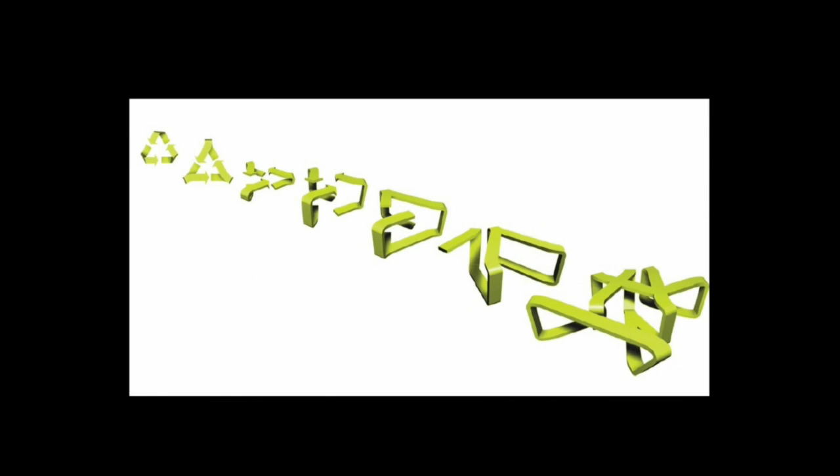To go a step larger, this is an exhibition space for Autostadt Volkswagen in Wolfsburg. It's about an hour away from Berlin. That's where you would go to pick up your car. It's a whole themed land around the car and mobility. And we were invited to do a competition on mobility and sustainability, which is part of their main building when you enter the whole Autostadt land.

The idea of the sustainability issue was, I have to go back here one moment, the triangular recycling arrows that you see all the way up in the left corner. This simple idea of recycling has long been taken over by a much more complex understanding, where dead-end roads in ideas of how we consume or behave sustainably are replaced by a certain uncertainty. If biodiesel was the solution 3 years ago, half a year later it was considered to be dangerous because it produces 4 times more carbon dioxide.

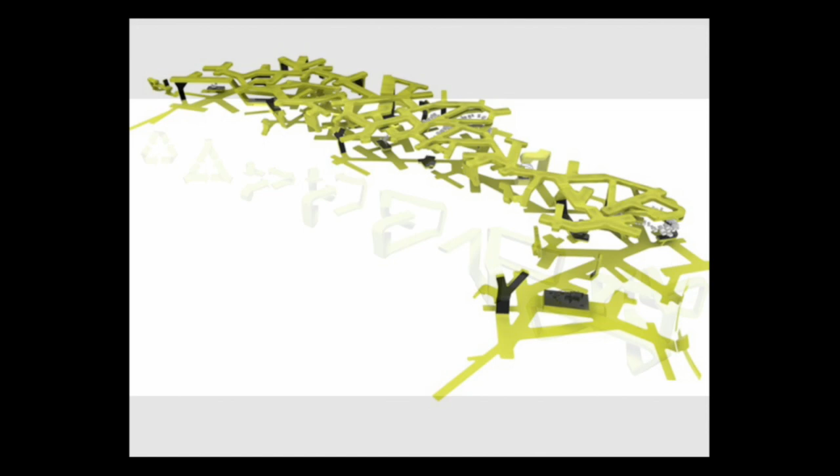And now this year, with all the missing rain, it even threatens the idea of providing enough food for the people. So constantly we have to re-evaluate how we are considering this responsibility for a future generation. This network of interdependencies, dead-end streets, became somehow a forest, a nature labyrinth, where all the different information points are embedded in this structure.

And if you are very interested, you can zoom in very deep into the information. If you are more on a distraction, or let's say on a stroll through the whole Autostadt, then you also still get a feeling of what the possibilities and the issues of mobility and sustainability can be. They count about 2,000 to 3,000 people every day going through this exhibition.

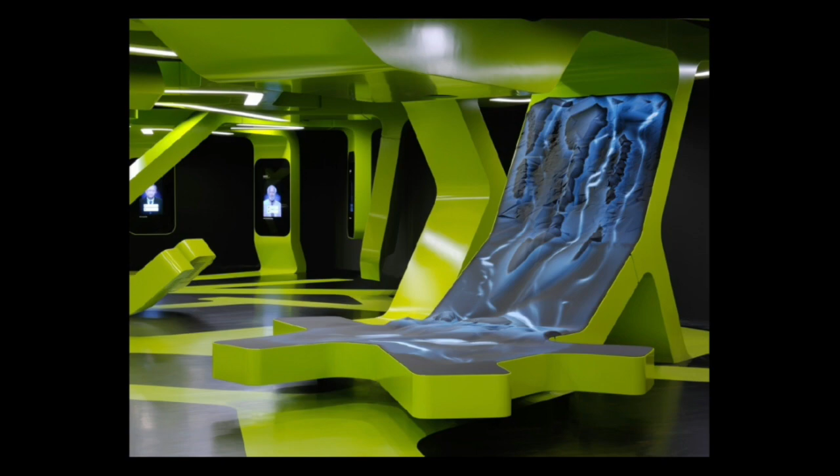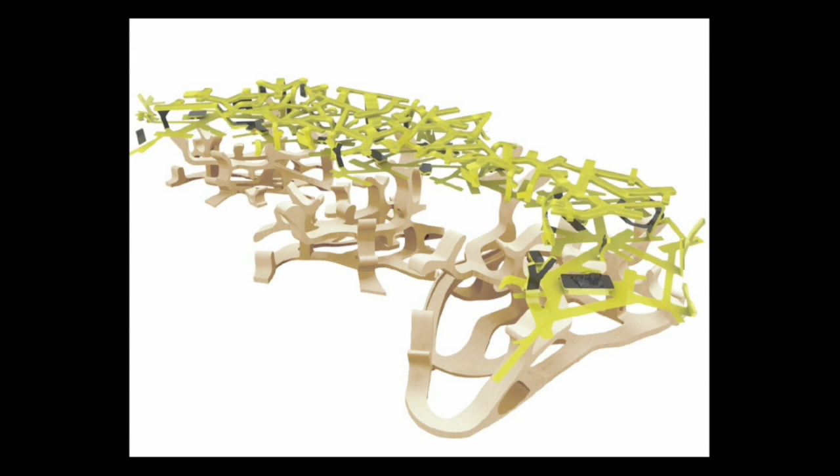Here you have a virtual waterfall. When you touch it, it creates different letters and combinations of insights. This year, we got invited to extend this exhibition in the same building, but on a lower floor, into a larger space that also brings this issue to kids from like 4 years to 12 years. And we extended this green world into kind of the stem, or let's say the roots for the mobility. And this is how we are working on this topic now.

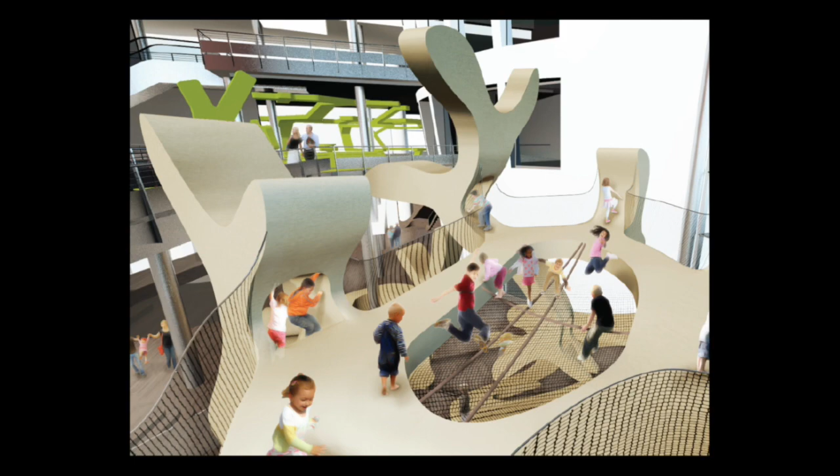It's all indoors, and it becomes something that's playful, that deals with the motoric and sensorial aspects of children's movement. And there are also, of course, stands and materiality solutions that all deal with the same issue here. So it's a concept that actually gets more and more developed, and also the geometry gets more complex now.

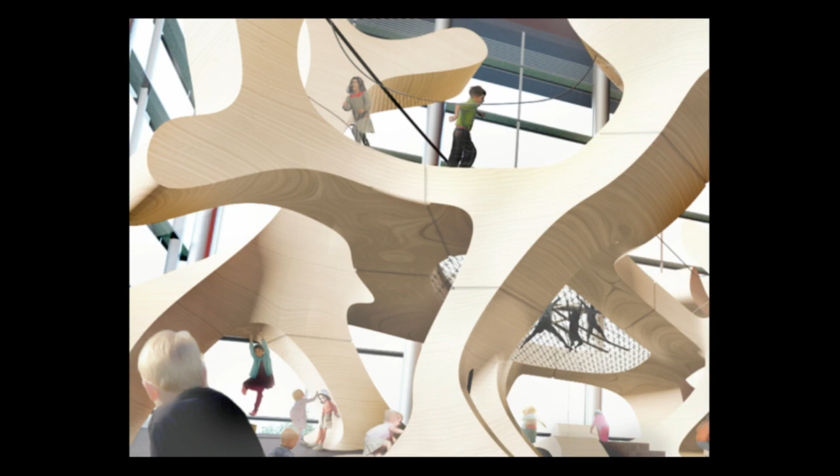Oh, I have a pointer here, up here.

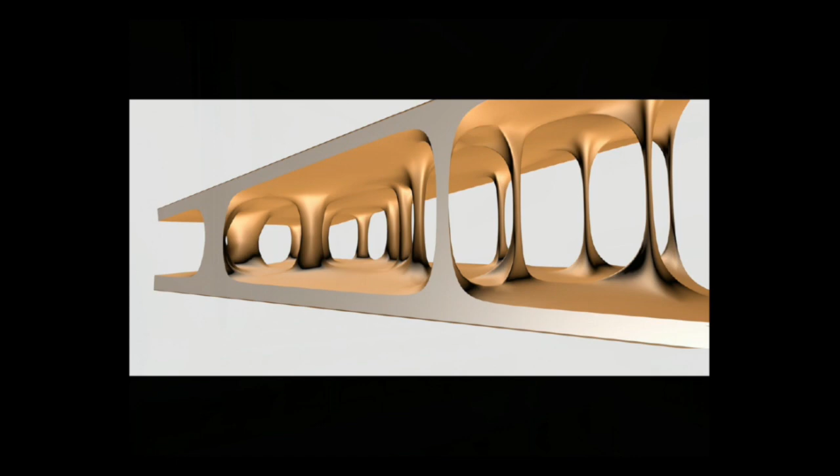This is then the building, and the problem was when we won the competition, we had to also confirm that it's buildable within the budget of a public building. The price was quite fixed. So the challenge was how to actually realize and materialize this building with a budget that was actually too little in a way. It forced us, and I hate to say this when there are maybe possible clients in the room, but in a way it helped us to become very innovative in the construction proposals.

We developed different comparable structures: concrete, wood, timber, steel. In the end, it became a timber construction with a polyurethane coating. And what's actually interesting about this, it's very easy to prefabricate. You bring it on site, you spray on the 3mm coating. It still is diffusion open, so the humidity can actually vapor. The wood is very protected.

And what becomes important, even more so in the Seville project that I'm showing at the end of the lecture, you also save a lot of wood because the 3 centimeters or 2 centimeters of weather protection that you have to consider in wood construction is replaced by this weather protecting layer. So there are a lot of aspects where this building in the end became a prototype for sustainable construction in Germany. And it also caused a lot of, let's say, strong criticism from German architects, because usually that's not what you do to wood. But it proved to be actually a very interesting solution. But at that time, like maybe 7, 8 years ago, this was not something to do.

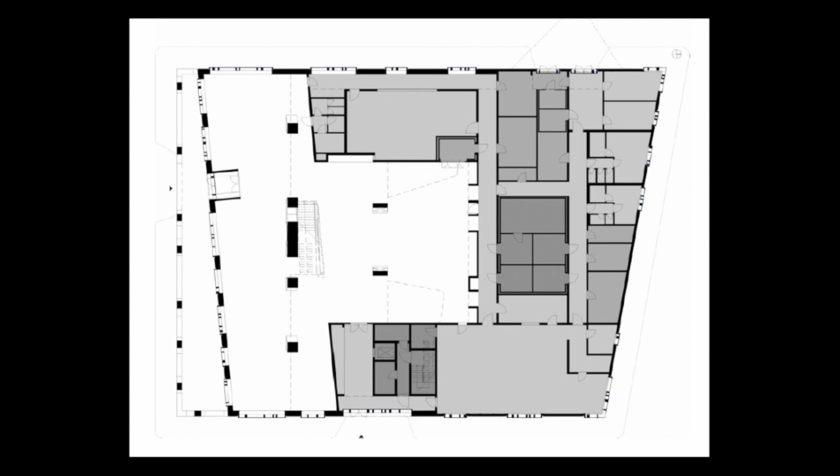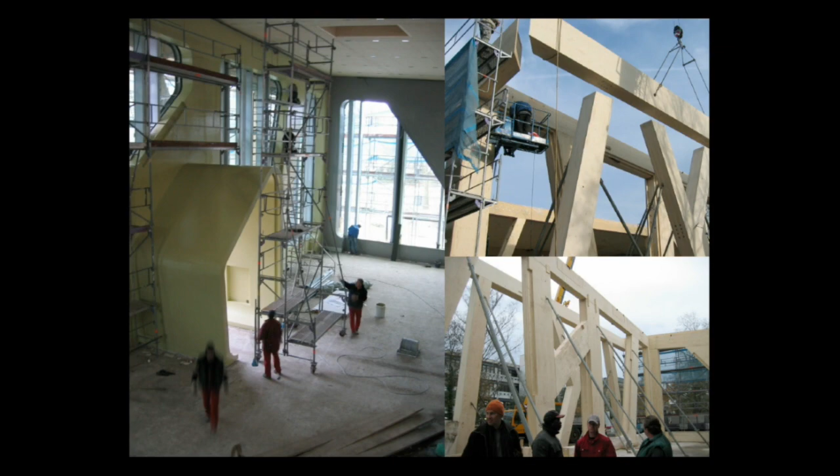It's prefabricated, you bring it on site. It's actually sheets of 2 meters by 40 meters, and you can cut out any shape you like. In this case, it was very straightforward, put together. The insulation happens within the layer of the walls, and then you spray on the 3 millimeter coating, which is kind of a sealing of the whole building. What's nice is you don't need any extra metal flashing. You set in the windows and that's it. The water drainage, everything is taken care of.

So what happens when we design is usually we try to be quite ignorant, maybe even naive, when it comes to creating the spaces and atmospheres that we like. But this catches us as soon as we have to think about how to build it. And this forces us, in combination with our engineers and the companies, to find technical solutions that actually hold the image and the atmosphere we wanted to achieve.

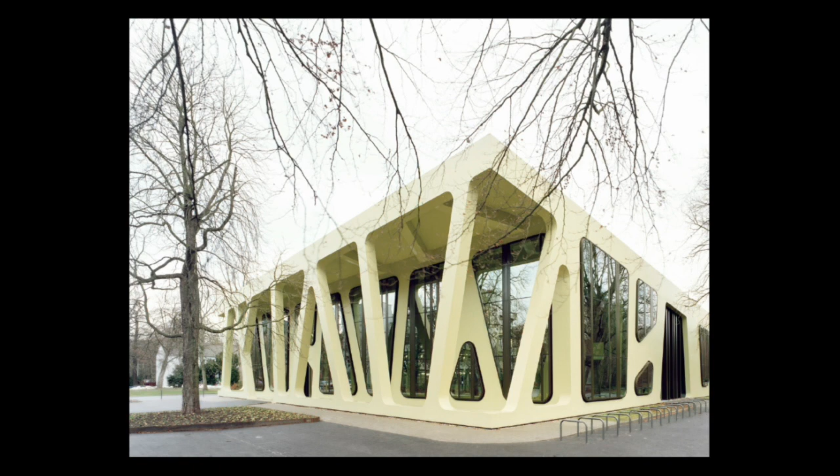It's quite irritating sometimes for a lot of people when there's no metal flashing at the top, or when it's the same material that runs down the columns and onto the surfaces where rain comes down. Quite often when we publish these things, the reaction is, oh, it's a nice rendering, but let's see how it looks when it's built. I think it's exactly because these elements that are taken for granted are gone, and therefore there's a certain estrangement even in the detailing that seems puzzling.

On a larger scale, and that's something I'm showing also in the lectures, it starts sometimes in small experiments and then grows, and also transforms each time it gets applied. Here it's a courthouse in Hasselt, Belgium, a competition we won in 2005, and it's finished on the outside. It will be opened by the end of the year.

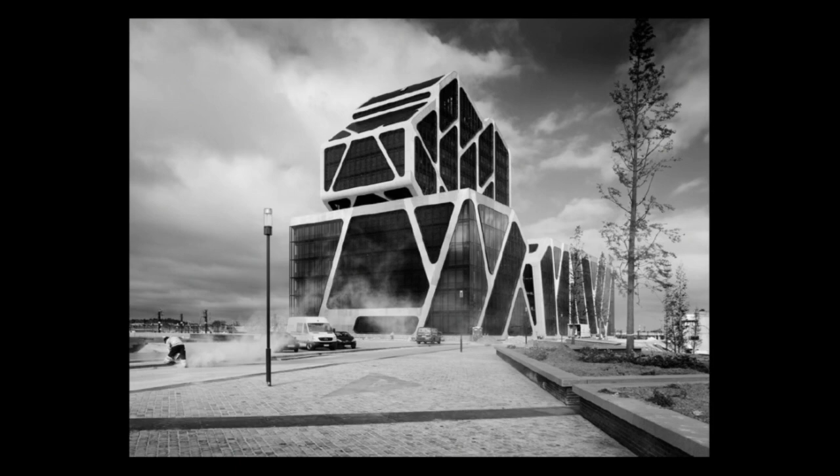It is on a master plan by West 8. Here is the train station of Hasselt, in Limburg, Belgium. This is the whole master plan area here. And the competition asks for the architecture of this urban master plan by West 8.

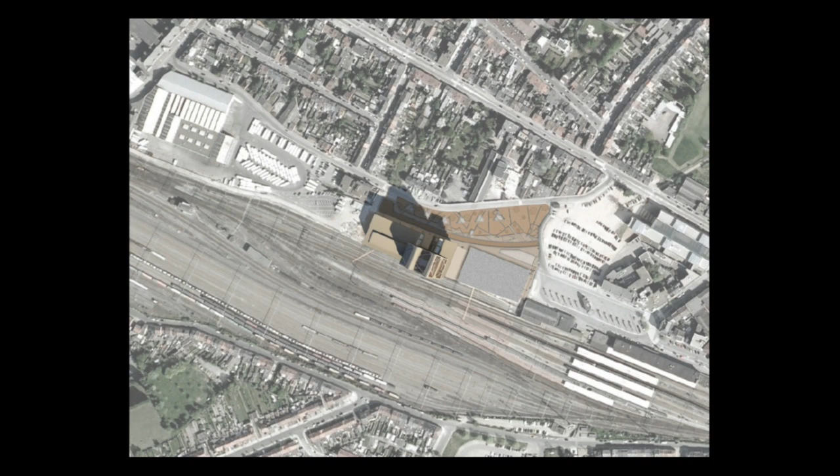So this is the first building to be built. There will be 2 high-rises, or 2 high buildings. The other one will be on this side. The courthouse that we were building, that we are finishing now, is actually a nice reference to the logo and history of Hasselt. Hasselt comes from hazelnut trees, and the logo has 2 hazelnut trees.

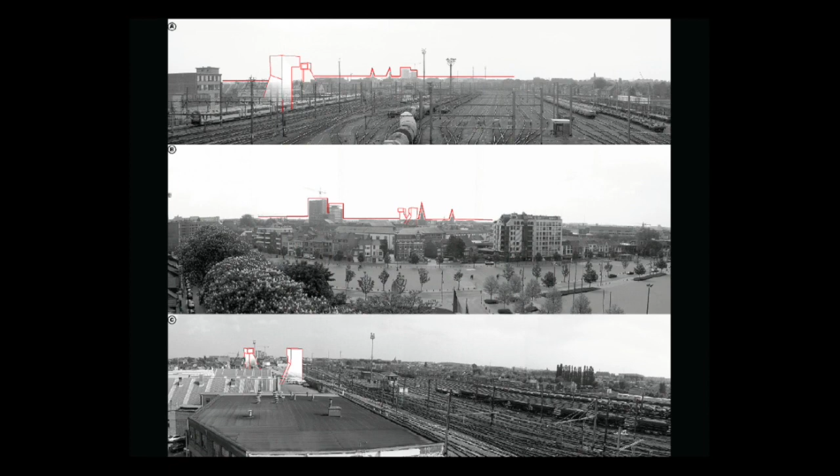But it's also interesting that the courthouse, speaking justice, somehow happened in smaller villages in former times underneath the main tree in the center of the village. So the tree and speaking justice, or making decisions in a community, is very much related to each other. You can see that there's maybe a certain metaphor that works.

Also, the city always has 2 high-rises from different periods. There are 2 Gothic churches, then 2 high-rises from the 20th century, and now 2 high buildings from the early 21st century. So there's also a kind of tradition. Here you see again 1 high-rise and the other one. This will not be built by us. 2 churches and 2 high-rises from the technical town hall from the 20th century.

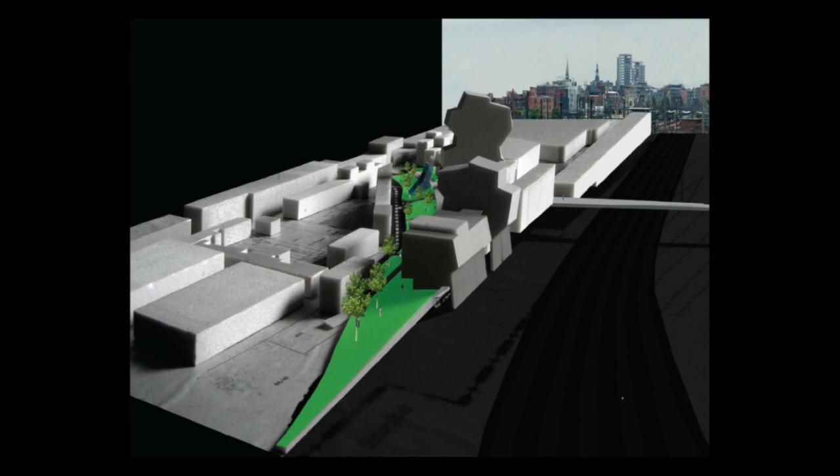So here you see some of the echoes that we also explored in the dining hall. And next to the train station, you see this kind of very big scale jump, but it will not be the only building here, so you get also buildings along the train tracks to accompany it.

An office building in Hamburg, and I think you see certain ideas of perforation and penetration happening, a relief in this building, where a speculative office building maybe allows you only to play with the 50 centimeters of the facade. It's a very straightforward plan.

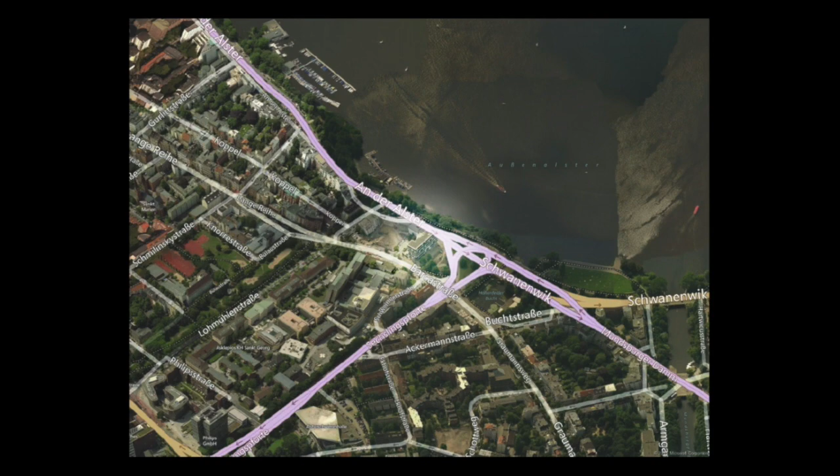It sits in Hamburg. This is the Außenalster, actually an inner city lake. We have a beautiful view from the building onto a park in front of it and to the larger lake downtown. These windows, or these eyes that are actually winter gardens where you can walk into the facade and use them as a place to read, to breathe, to get some fresh air, are happening in each rental unit.

And then there's a park in front of it, which also is designed by us. It was a deal with the city where our client invested in the redesign of the park, which was kind of a rundown area, and therefore he was allowed to build a little bit more square footage here.

The floor plan is a very open, flexible space, and these eyes, these moments where you can actually get into the facade, are happening where there are special moments for, let's say, a meeting room or a communal space, a lobby area. Here's a moment where you can do that.

But also this kind of idea of the relief and the texture goes into the structural moment. Here you have a precast concrete ceiling. You see it in separation walls, even all the way to the furniture and into the meeting rooms as well.

Here in the end, you would look onto the lake of Hamburg. But when you're inside the building, you get the reflection of it also in the park. And if these are special raised areas where you can have a picnic at lunchtime, you get these moments of rest, or these special moments, kind of the same thing happening in the facade of the buildings where you have this program behind it.

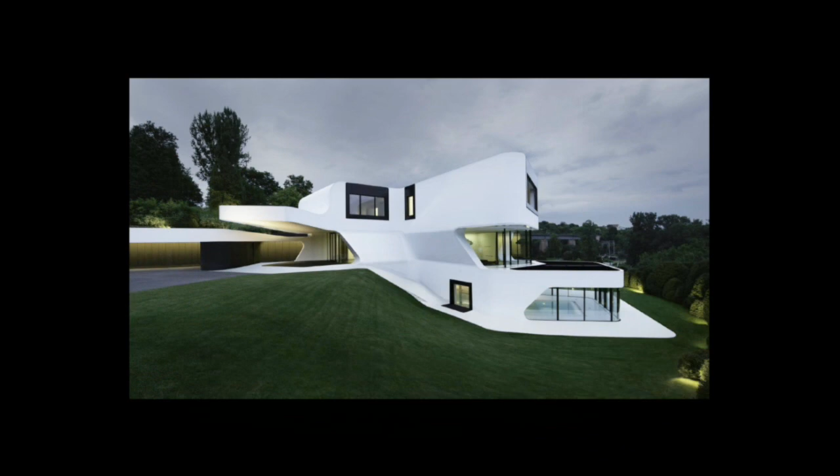A villa near Stuttgart. This is a private home that, again, was difficult to come up with the concept because the client was so dedicated to the house that was there before. He started to build it in '84, and with every child and with more money, there was a whole collection of materials. Actually, a really interesting catalog of what was going on in the last 25 years. So you got marble floors and travertine floors and dark granite and light granite and everything.

Outdoor pool became covered and became an indoor pool and extended into another indoor pool. A balcony became a winter garden in the room. So actually a really interesting collection until even a kind of 90s minimalist edition was added as a garage. So he said, we really like this because it's kind of our home, but we don't really like as it looks anymore.

So we developed this idea of family archaeology. We said, okay, we have to keep some of the concrete and the footprint of the old building, but let's take this geometry as an echo of how the building was actually growing over time and make this into the guiding principle.

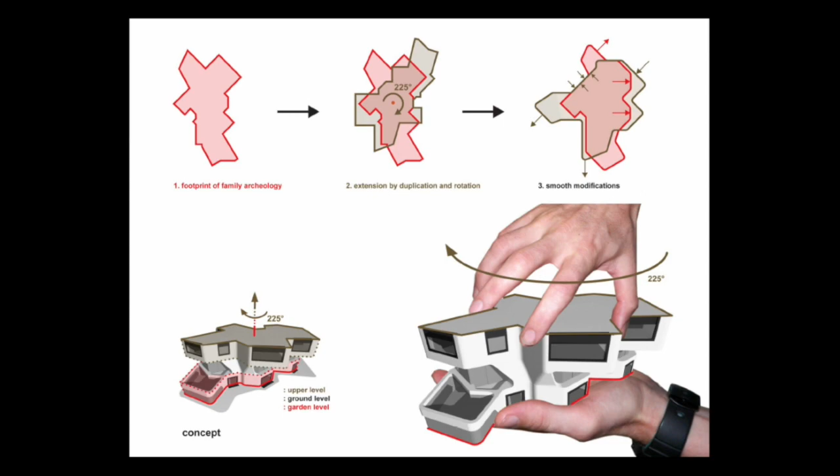Similar to the dining hall that I showed earlier, where you had a floor and the ceiling and the elastic space in between, here it's the ground floor and the upper floor rotated out from the ground floor, basically from the footprint, and that's how it happened.

Do we have to focus? I don't know. Okay, so do I have to focus?

The house itself has the footprint of the old one, but then gets this kind of envelope again, this whitewash that takes the whole building and melts it. You have the lower level, which is the private level, and the upper level, which is the private level for the parents, in between the two kind of the more public areas in a home.

So here you have dining and library and reception and living room. This is the lower level and the upper level. And also, again, you have some reappearing strategies when you design.

It's a horizontal symmetry that happens here. So this distance is the same as this one. The window basically is the same, here flipped around. It runs through this whole thing as a kind of horizontal line, a horizon line through the building.

And then you get this white building, this white color that melts it all together. And when I mentioned before that this ignorance of how to build it kind of catches us, this was a serious one, where I think you have maybe 15 different detailings from the upper seal, from the roof level all the way down here, where also the materials change from a polyurethane coating to a stucco, in the end to a tartan rubber floor here at the bottom.

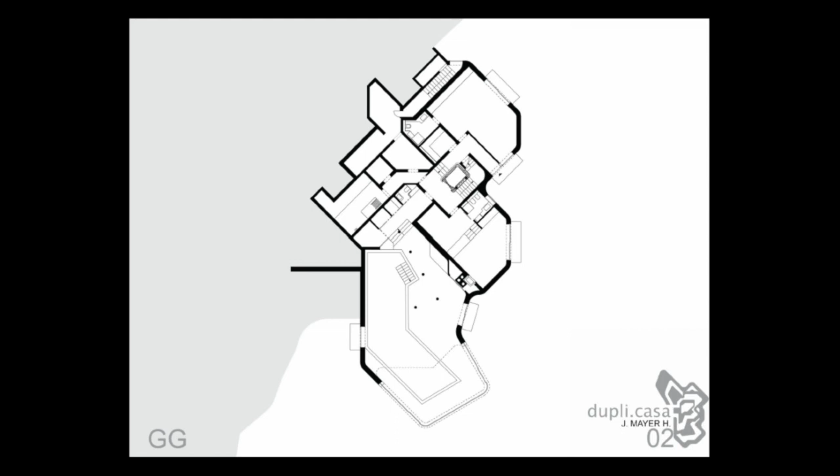And so basically all that happens behind that white color that you see, but it's necessary to actually keep that whiteness that holds it down, the blanket that holds it down on the ground. This is the plan where you have a lot of the existing walls still here, and the swimming pool and the children's rooms. The main floor has a central atrium with 4 leaves, kind of 4-leaf wings with cores that separate the different areas.

And then the upper floor, it's the private area again. All the cantilevers basically happen through this rotation, and then every room, or every area, had its own dynamic, where we had to go a little bit bigger or we had to retreat. But it's the result of really massaging the program coming from the original footprint of the house that happened there before.

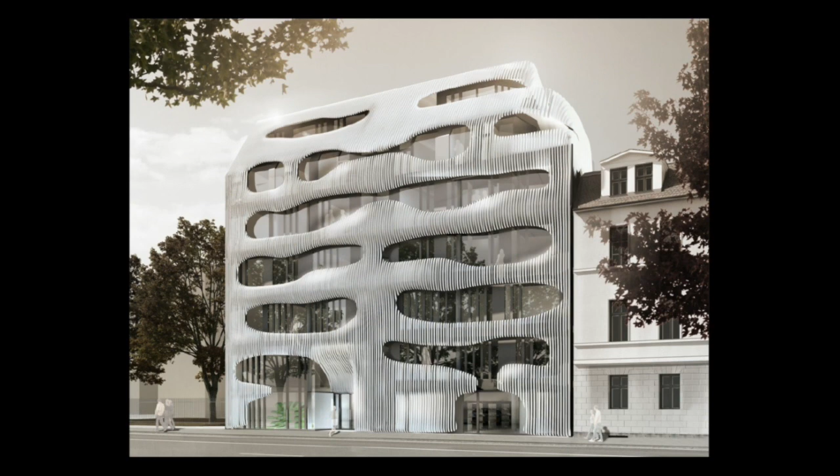Another housing project we just finished in Berlin is an apartment building, and it's completely different in its scale, but also in its relationship to the city. Here it's in the very heart of Berlin. It is next to a Baroque building here. There will be another one at some point here.

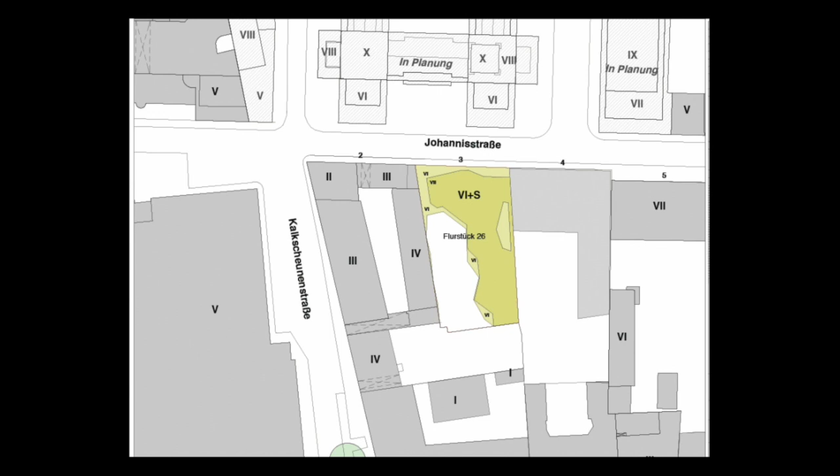Very typical in Berlin, you have a front house and your side wing. You see that also happening in a lot of these buildings. So quite often you have a very green, big courtyard or inner block. And we take this green nature idea or landscape idea into the building and take it all the way up and into the building. So we step up step by step with balconies and terraces, but we also have these living room sunken areas as kind of cozy sitting areas.

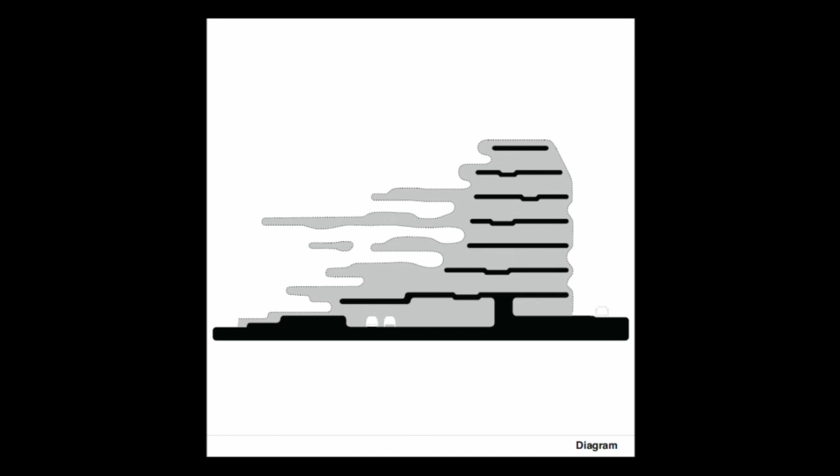And then it becomes even more organic until we have this veil of the building that wraps the whole building. The back, again, is this courtyard, the 2 elevators and stairs, and these lounges that happen in every unit. And every apartment is completely different, also in terms of the layout and where they are happening in the building. So it's quite complex in its interior organization.

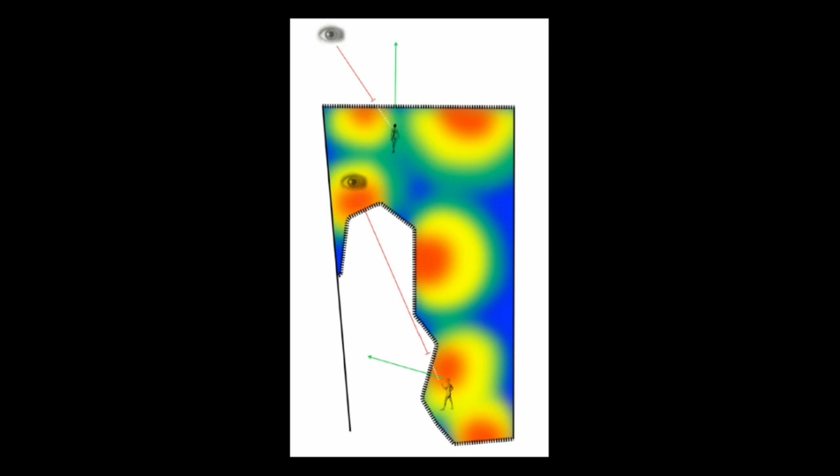The idea of the facade actually came from the backside, where you have a problem of looking from one apartment into the other one. And the idea of the lamellas helped us create a certain privacy in a building that we wanted to be quite transparent and open. So you have these moments where things are hidden or covered, and areas that are more exposed.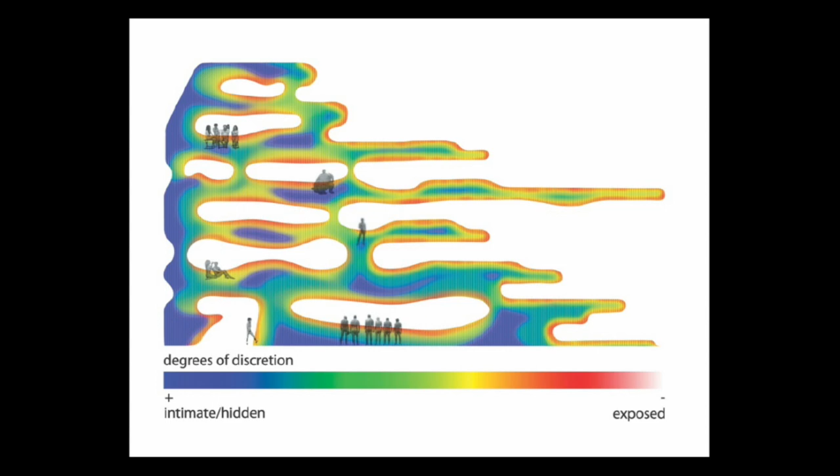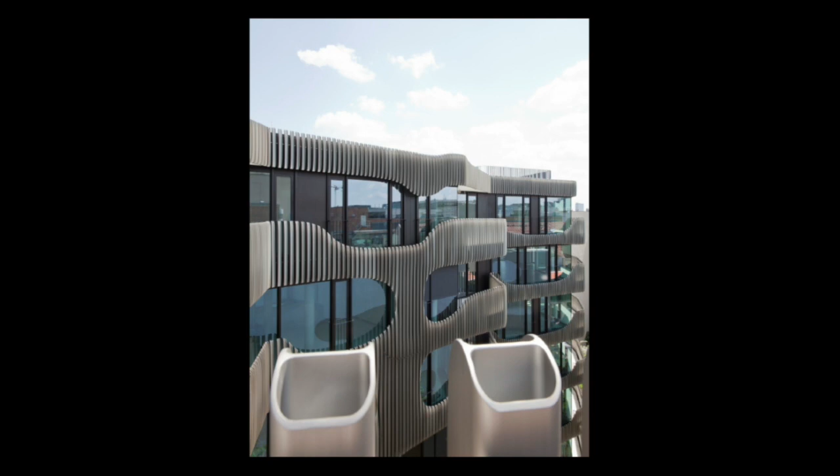So here you get a diagram of the side facade where this idea of privacy and discretion is happening. But it became also a topic for the whole building, where it became the railing, where it becomes a kind of shadowing device. Here you see how this protection, maybe there's a bedroom or even a toilet or bathroom behind it. You have an all-glass facade with these elements taking certain moments of privacy.

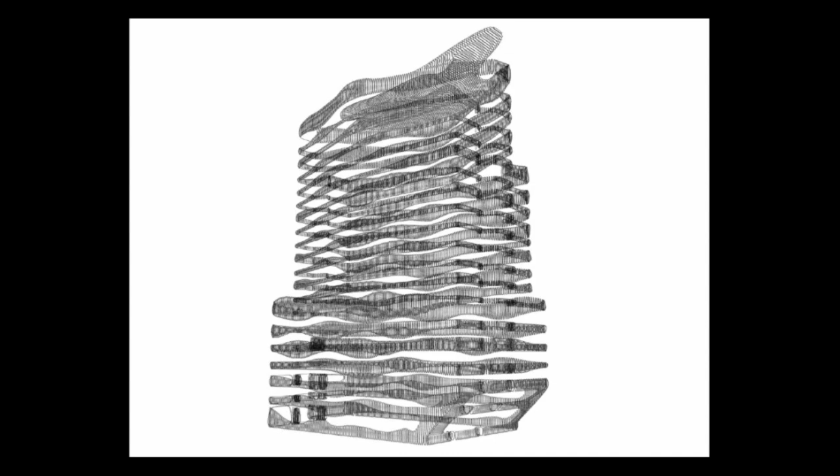On a bigger scale, this is something we are working on right now. It's a competition we won for a living high-rise, an apartment high-rise in Düsseldorf. It's a building that has actually 6 floors of offices, or practices for doctors and small surgery units. And then all this here is a housing block.

If you know Düsseldorf, this is the Rhine Valley, this is the main city. And this is on the other side, here where there's actually a hospital and new development from Kees Christiaanse's ASTOC urban planners. The other building I'm showing you in a second is this one here, also a competition that we won. So this is the building here. We are now in the first phase of redesigning, or design development.

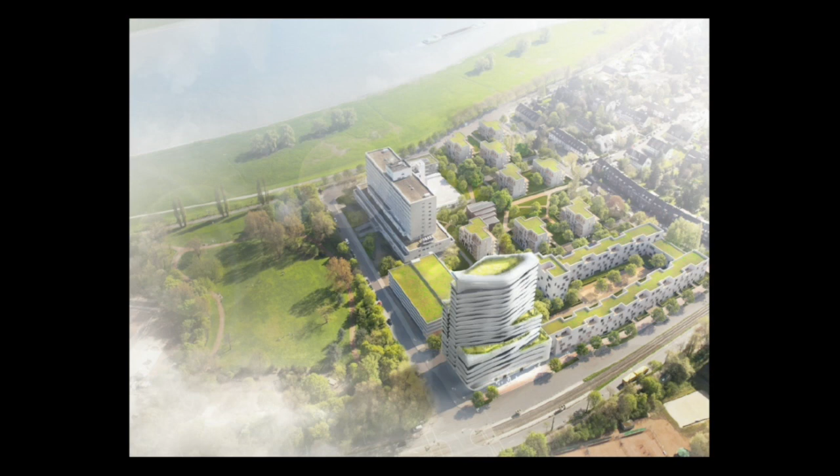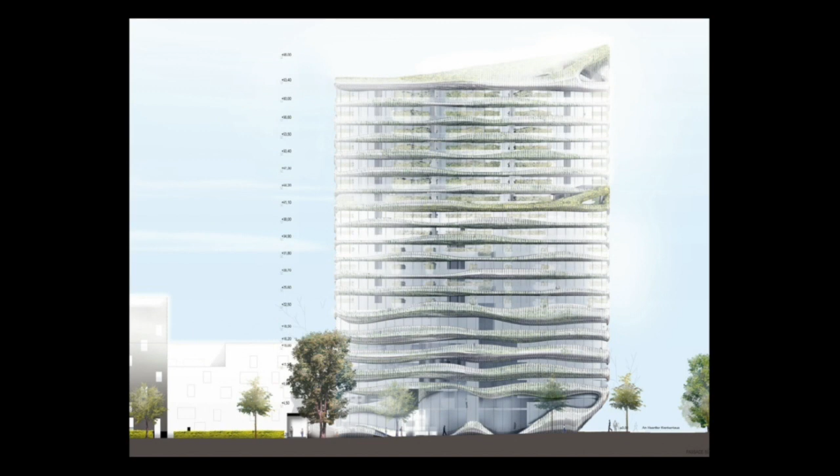We won the competition in May, so it's still very fresh. All of this here is urban planning by ASTOC, and you see the Rhine Valley too, now it's here in the front. The building is quite complex, but we have some echoes, let's say, of this kind of softness that envelopes you, that kind of hugs you when you live in there. And the different apartments that we are working on right now create a certain kind of combinatoric and puzzle within the building above the doctor's offices down here.

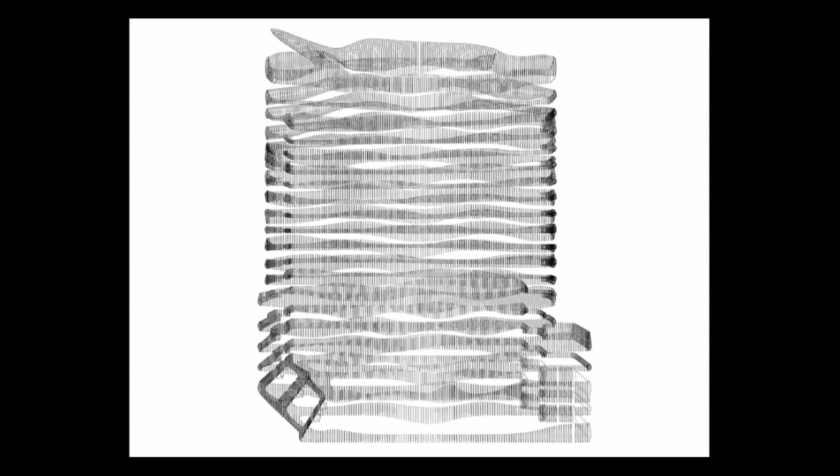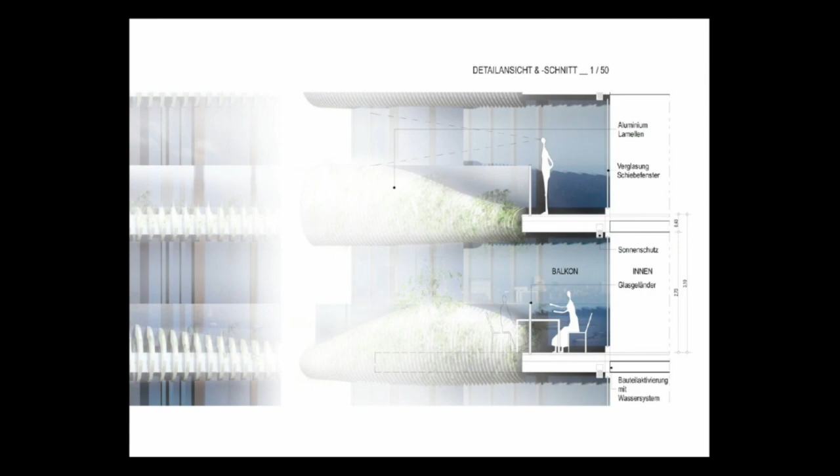So it's very early, but I want to show you how certain ideas move step by step from one scale to another, also in terms of the materiality. In this case, it will be an aluminium element that we're working on right now. Again, a completely different, let's say, materiality of sensorial experiences. And ideas how to deal with wind issues, of course, protection, not only from views, but also from certain climates, still keeping a certain transparency.

But what is important is that you also have a couple of, let's say, communal facilities. In this case, the terraces are important also as shadows, like noise shadows from this main busy street here. And you have a communal terrace with a view back onto Düsseldorf. That's what you see here.

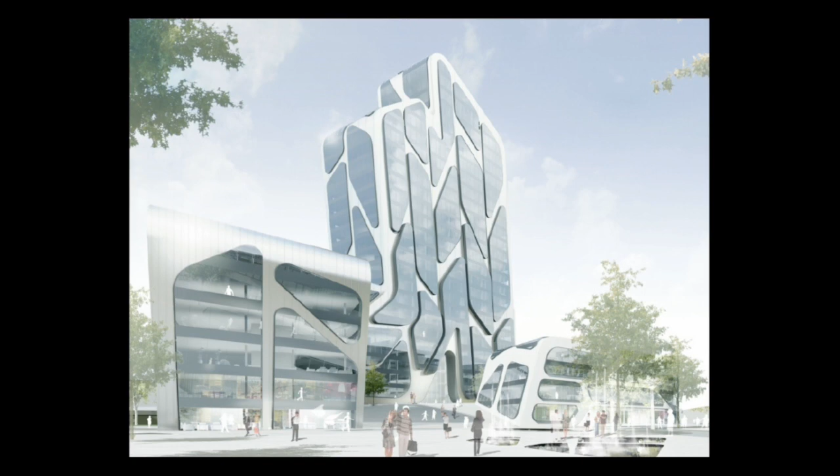It's a whole block. It's actually a ring next again to the train station. That's something that you see, I think, happening all over the world, where inner city industrial or cargo areas will be transformed into lively parts of the city. Here it's a hotel in the front. It's a mixed use complex. It's sports facilities, it's offices, shops, and it looks like it's going to be bought by a Japanese investor. Düsseldorf has a big Japanese community, and it might become kind of a Japanese trade center.

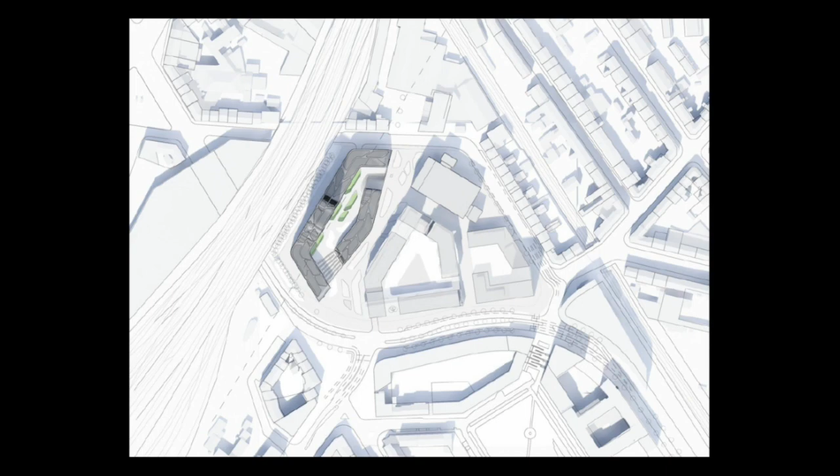So you have this whole kind of ring of a building, but this is the high-rise part. You have basically a front step going up and this court or little plaza in front of the high-rise. Important for Düsseldorf is the dance theater, which is here, and the train station here. So this becomes now a new kind of boulevard that brings people from the train station to this cultural institution here. So things get bigger and bigger.

Maybe the biggest project we worked on so far is Georgia. Georgia is a country that is extremely lively in its transformation. And we got a call about 3.5 years ago from the government for a possible project. That one never happened, but a certain kind of discussion, exchange did start. And step by step, we did a lot of mostly very small projects, but it became kind of an acupuncturing of Georgia. And all the spots that you see here are possible sites or already existing sites where we did projects. The first one happened without us knowing it. So it was a little bit of a bumpy start.

This is a proposal we did, actually one of 4, for a cafe sculpture, a public sculpture in Batumi. And we never really heard back from them. And then at some point I got a call for maybe a possible other project. And while they talked to me, they said, and then you can come to the opening of this cafe. And I said, well, I don't know what you're talking about. Well, we built this cafe that you sent us. Basically, we sent them the renderings, actually 5 different renderings from 5 different designs. So I said, well, that's a little interesting. Since you want to become a Western country, there are certain copyright issues to consider. Okay, let me get back to you.

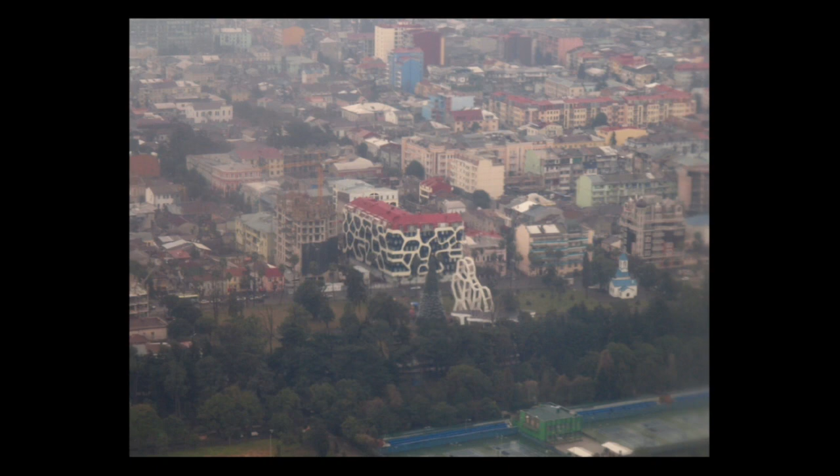So actually it was built without us knowing it. And even further, somebody liked it so much that they built a new facade next to the building. So when I met the president the next time, he said, well, it's like a fake Rolex. It's kind of an honor, isn't it? And I said, yeah, that's the way you can look at it. So from then on, things went very smoothly. We were asked to redesign a proposal for the new checkpoint between Georgia and Turkey, which is here. So Georgia ends here, this is Turkey.

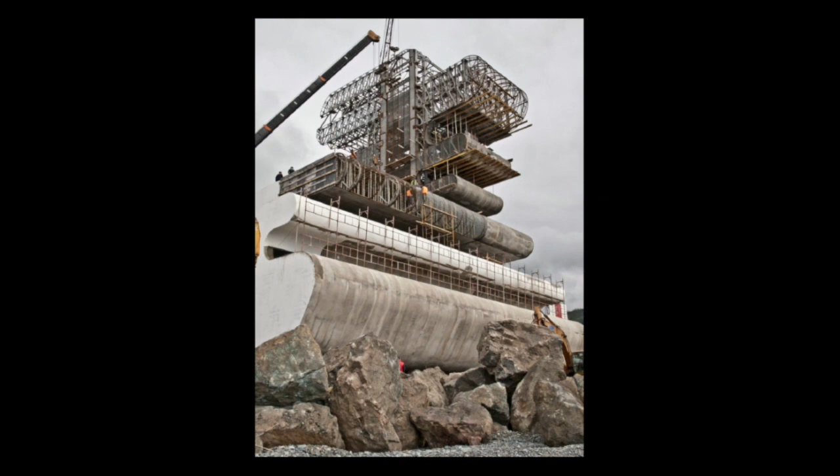Maybe one of the most beautiful sites we ever were asked to design something. And you see here a building that is not so much a division between two countries, but it's mostly a meeting point, or it's considered to be a place where you can actually rent spaces, where you can, of course, go and shop, but you can also use it as a conference center. And what happens, it's really on the waterfront, that people are also using it as a beach. And the beach happened to be there before. So it's a really lively space.

It is, as much as it is, of course, a marker between the two countries, also something that opens up the relationship between the two countries. They're working on a much more fluent transition. Now you can just go with your passport, actually you can go with your ID card. You don't even need a visa anymore as a Turkish Georgian citizen. So it's fascinating to see that a country considers their border stations as something for architecture and also something that has a positive, different idea.

I mean, Georgia is mostly also a transit country. There's hardly any oil or anything else. It's a country with agriculture, but also it's an important transit country from Azerbaijan to the Black Sea in Europe or to Turkey. So transit architecture, or architecture that you see going through the country, is really something that's important. That's the way you see and experience Georgia.

So here are some of the impressions. You see the terraces, even the tower, of course, there's an overlook, but also the terraces, you can go up and overlook the station, overlook the sea. You have the conference rooms actually on the roof above the checkpoints with a view onto the Black Sea. It's a real welcome sign to the country, or even like a goodbye, of course, as well.

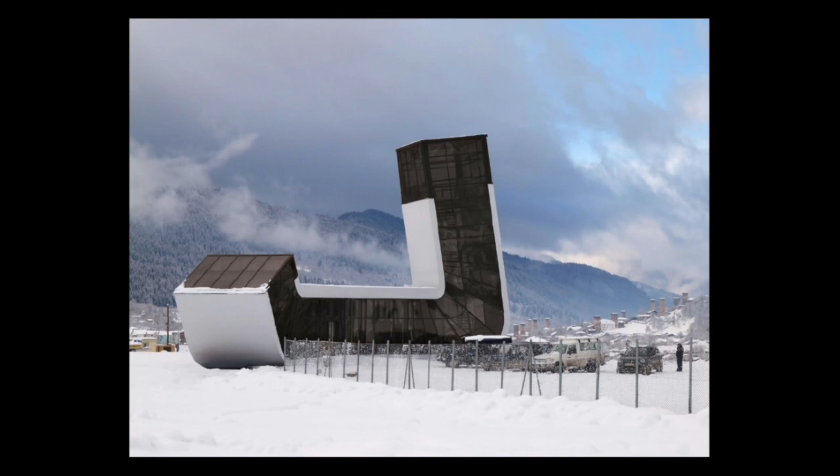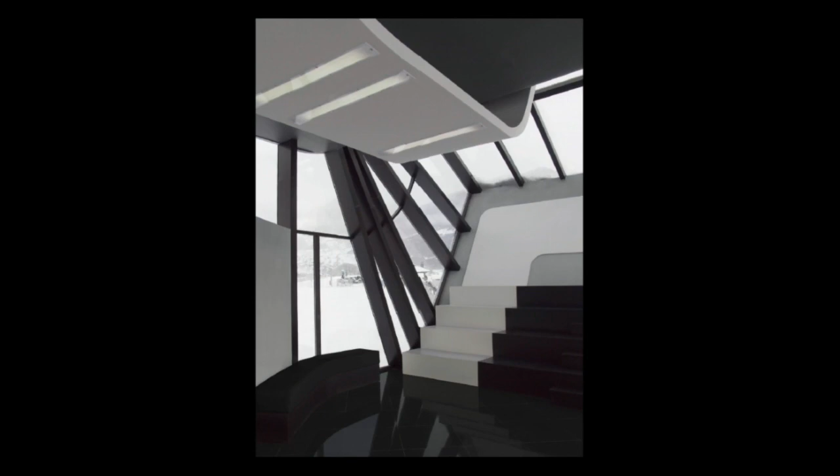It's 280 square meters. It is in a super small town called Mestia, which is up here, a UNESCO heritage site with all these old wooden towers. It's a city, or a region, that also has developed into a tourist destination for hiking, for skiing, and so forth. And it's a really beautiful, still very intact city in Svaneti, which is in the high mountains of the Caucasus.

You have a Georgian airline that actually operates between Tbilisi and Mestia, but you can also fly from there to Batumi and actually swim in the Black Sea, and then go up and ski. So it's very much about these different landscapes that Georgia is offering on a very small territory, actually.

There are also 2 more buildings in that city. It's the little town hall here, where you can also go and have a wedding, and the police station. And I'm still very impressed, even now that I look back, they are finished now for about 10 or 12 months, that somebody really takes care of how a police station looks. It's the idea of making the country into a contemporary country.

I don't want to be the ambassador of Georgia, I'm not in that role, but it's incredible to see how much it changed and how much support it has with the young generation. Our period is going to come to an end soon, I'm sure, but it was, or still is, a really interesting way to see how the city or the whole country actually changes.

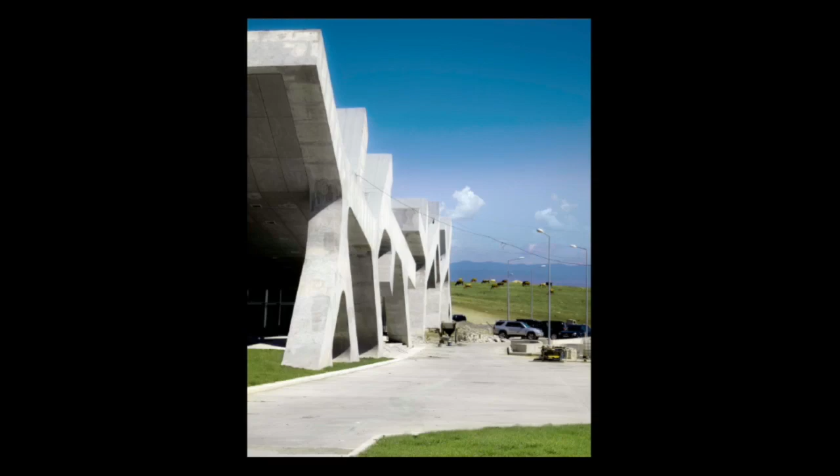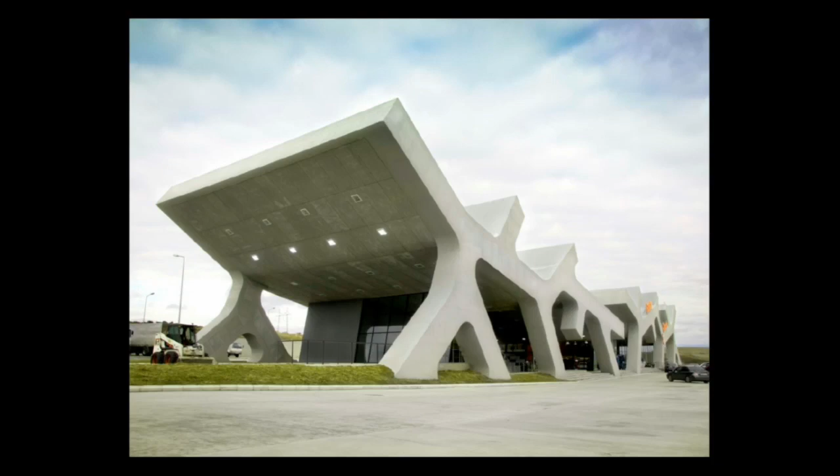We built 2 rest stops along the highway that they're building now. They didn't have a highway so far. It's in Gori, the hometown of Stalin, and they're building, in the end, 20 of these rest stops along the highway. This is also an interesting strategy where these rest stops are sometimes built in areas where there is no highway yet, but they bring in infrastructure like a supermarket, a cultural space to show arts and crafts from the region. They bring basically an idea of the future to areas where there's still, not medieval, but a very old-fashioned lifestyle.

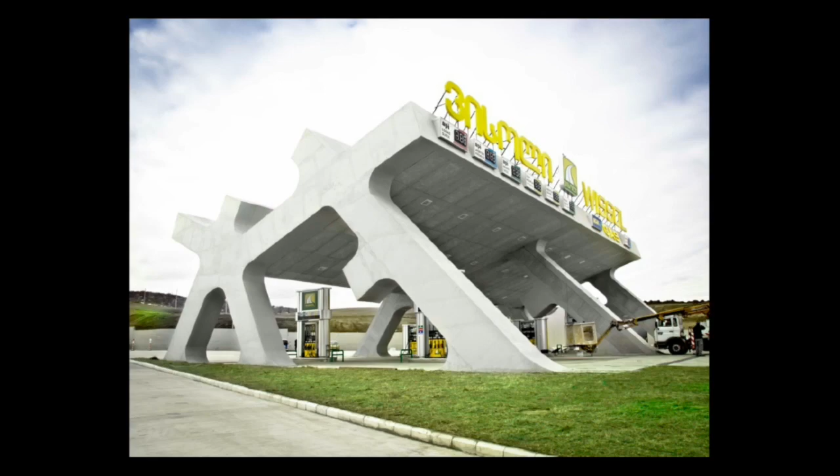And here you have some of these buildings, two stations already opened last November. And in this one, they already had 2 or 3 requests, I don't know if that really happened or not, to have their wedding celebrations in the rest stop. So a kind of strange story, or I guess an honoring comment that you get from the normal people who really are using these buildings in the end.

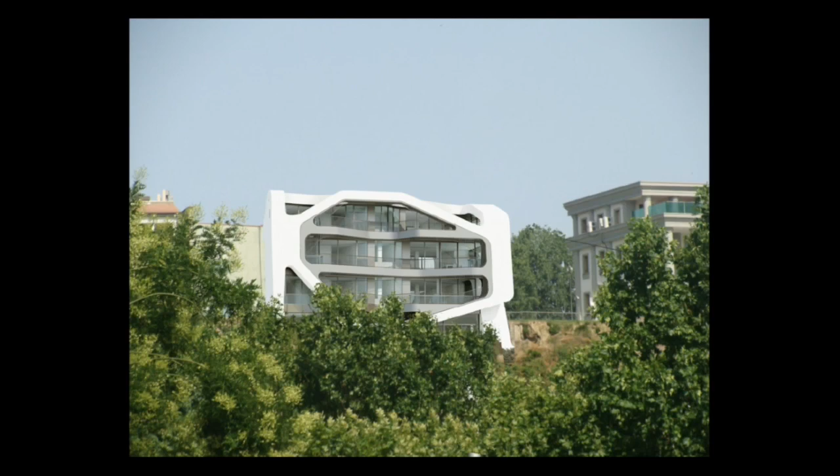In Tbilisi, we are working on a big villa, also a little bit obscure because I only met the client once for maybe 15 minutes. It also happens through agents and other people. It's the building next to the President's Palace here. It is a villa that sits basically on top of this rock ridge overlooking the city.

And I think we are up here now with the construction. We only get once every maybe 2 or 3 months some pictures from the construction site. So it's a different way of working. Sometimes you're very much involved. They want a lot from you. It also depends, of course, on the client. Sometimes you really have to fight for being involved.

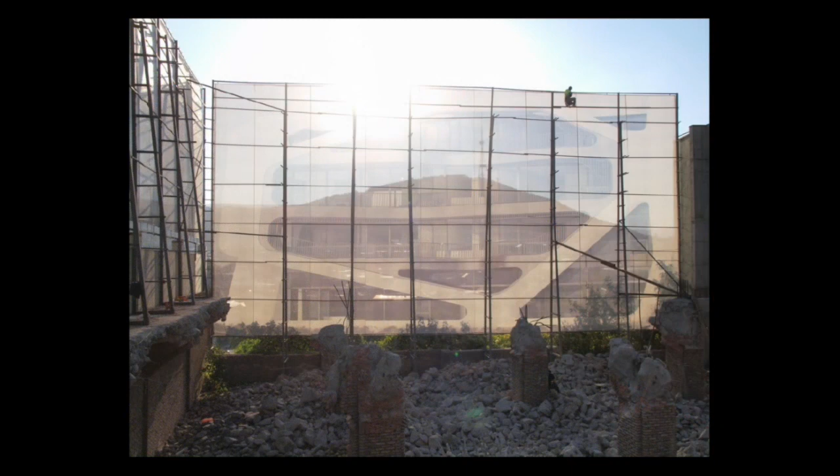But compared to how little we are sometimes involved, the outcome is surprisingly good. So you never really know. It's a real adventure to build there. And these are old images here. It's a screen, of course, that you project a lot on at this point.

And the last project I'm showing you from Georgia is in Lazika. Lazika will be a new town for 500,000 people. It's a plan to build a city here. I think they just started to lay out the streets. I was there once when there was basically nothing yet. And one of the first signs for this new city is a marker.

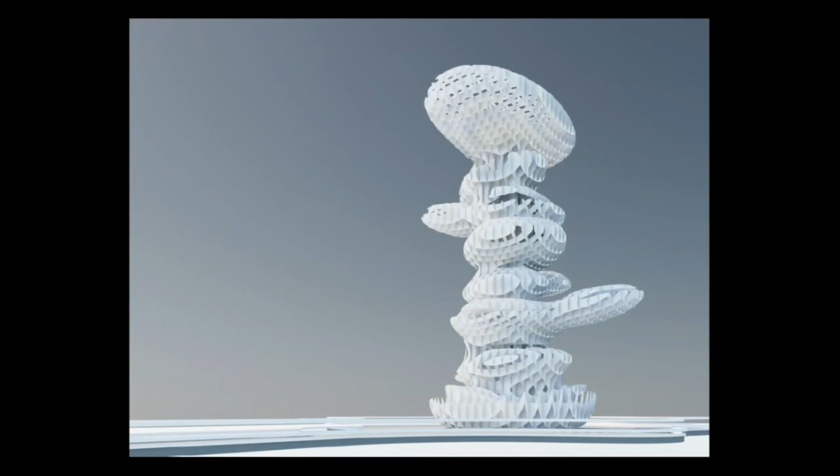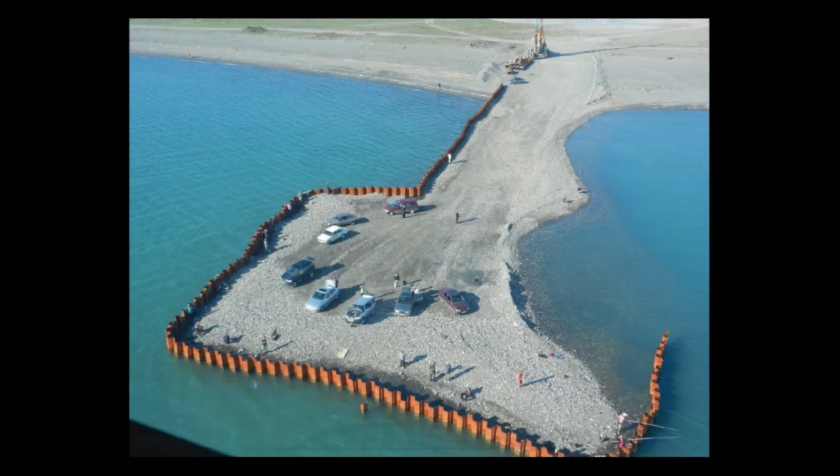It's a sculpture in the Black Sea, a kind of 35-meter high sculpture on a pier that actually will become a point to go out and look back at the city along the beach boulevard. And so here we are making some proposals and renderings. You already see the preparation work for the pier. It's a little further than this. I think the opening will be end of October, so there's a tight schedule for that one.

It is made in steel, shipped from Turkey with boats to Lazika. And here are some wireframe images and renderings of the piece. Here again, you see some echo of what happened earlier in Metropol Parasol.

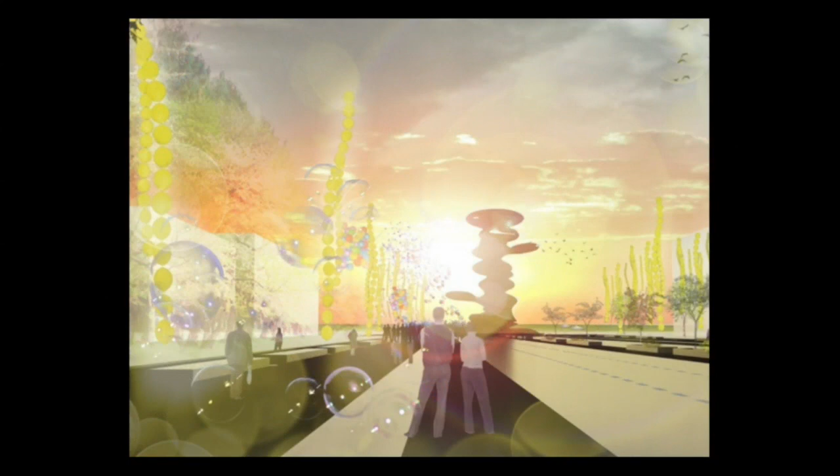Do I have some time left?

Yeah? Okay, good. So this is Metropol Parasol, and I'm showing this now in more depth. It's, I think, our most complex project, and it also guided us in the last 8 years, from winning the competition in 2004 to opening it last year, and now seeing how it gets appropriated, how it gets used, how it starts to age, how it starts to be modified since it's part of the everyday life of Seville.

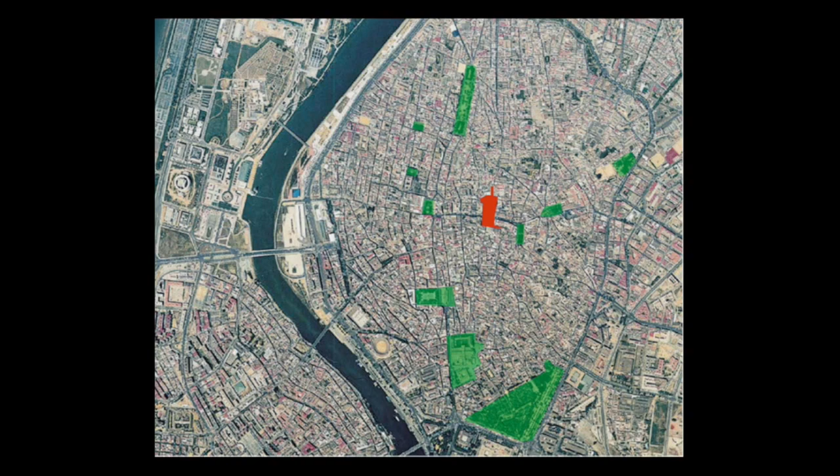The piece, Metropol Parasol, really sits in the very center of the old medieval downtown of Seville. And here you see it with the red spot as the major square. It was the site for the market before. I think I have an image in a sec. This is how it sits in the very dense urban fabric of Seville. It's supposedly the largest medieval downtown in Europe.

You have other big institutions like the cathedral with the Giralda Tower, the other high point to look down onto the city. You have the town hall with the square. You have the bullfight ring up here. There's the waterfront. Over here you would have the expo site from 1992.

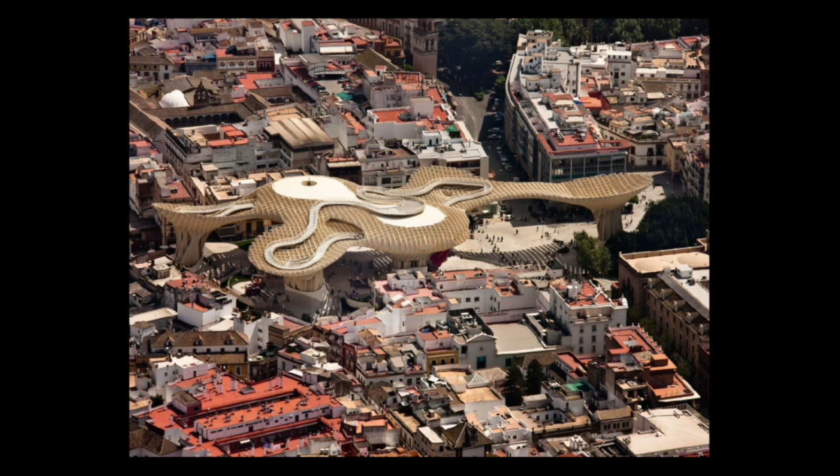It was never really a plaza. It was always an institution. There was a cloister before. It became bigger. They ripped down more medieval fabric. They built a bigger cloister. At some point, that was taken down to build a food market, the main market, which existed till the 70s, basically, and then they had to move it outside of the city center because the city grew too large in the 20th century, and they had to basically make a larger structure outside of the city.

So here you have the very center of the city where the major roads or the passages through the downtown all go through Plaza de la Encarnación. And so we bring back basically an institution, a building, an object that occupies that space. It's also not a square like the Plaza Mayores or Plaza Reales where you have the same facade enveloping or wrapping around the plaza and creating this unified frame.

Here it's very nervous, small buildings, high buildings, because alley buildings all of a sudden became facades to a plaza. So it's a different process how this open space was created inside the center of Seville.

This was also the site or the condition when the competition was launched in 2004. The city wanted to build a parking garage underground, and when they started digging out the earth, after 6 meters, they found all these Roman ruins and mosaics, and that's when everything stopped. And the city used that moment to reflect what is actually public space in the 21st century.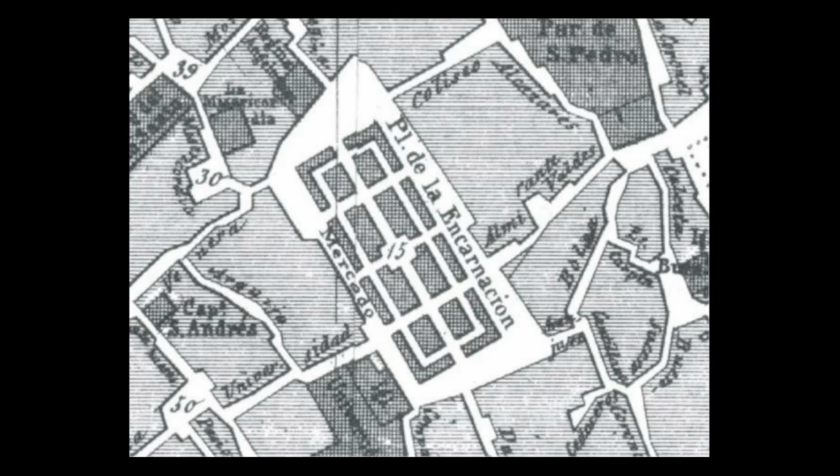Maybe today you would save them and actually try to keep that structure up. In the 70s, it was a different idea of the car and the city and modernity, of course. This is how it looked. It was more like a framed, or let's say a walled-in market. And then it was a temporary situation for about 30 years with this parking spot.

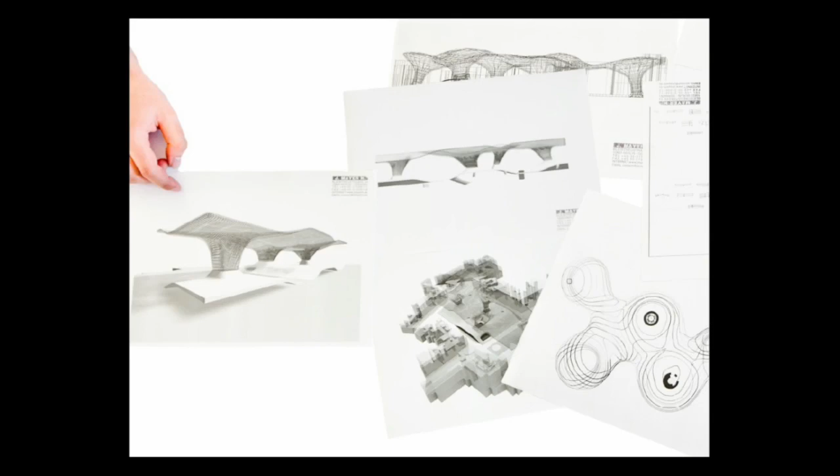When we were starting to think about the competition, we thought about shadow, or let's say creating a climate that makes it possible to actually be outside in hot summer months or most of the year; that was the guiding rule. So we started actually with different shapes of a roof, a big shadow device that would protect us from direct sunlight. And we did a couple of studies of different geometries and formations, but we always came back to this form that you see now because it looked the most relaxed or the most natural to us on that site.

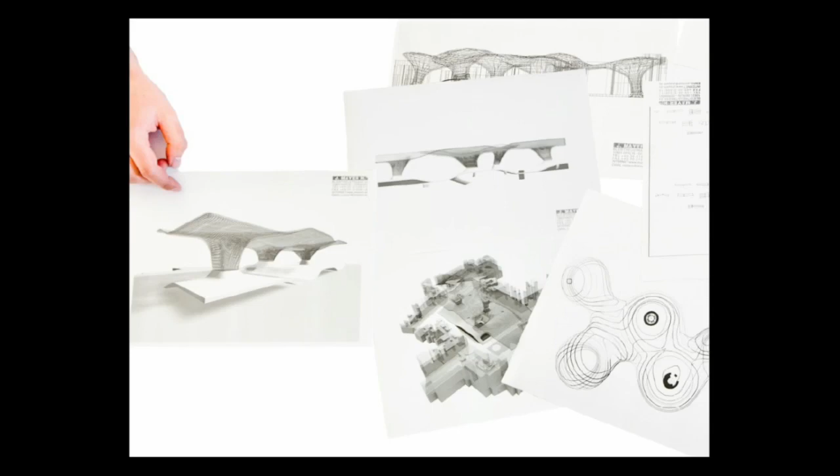Of course we worked with all kinds of media, with study models and computer renderings and animations to test it on different scales. In the end, it became this kind of undulated roof that is a double roof here with a restaurant inside and a panoramic view on top. Then we had to collect the forces because there were only very selected areas where we can go into the archaeology with our loads. So this is how it actually comes down.

But from the other side up, you have the archaeology as a museum for the history of Seville. You have on the ground floor a food market and also some commercial areas. You have the elevated roof for the market as another elevated plaza, and then the Metropol Parasol roof structure. The plaza itself has some irregularities, and each pocket has a different subclimate of its neighborhood and how they use the space.

Even the elevated plaza has a different kind of feeling. So it's possible to activate or to program the plaza with different kinds of moments and activities and times of occupation during one day, or even in the cycle of maybe a week or so. Some plans, I don't think I should go too deep into them. We have the archaeology here with some selected points where we can go in with the loads. This is the ground floor with a passage running through to connect the southern pedestrian street all the way through the building into the northern part.

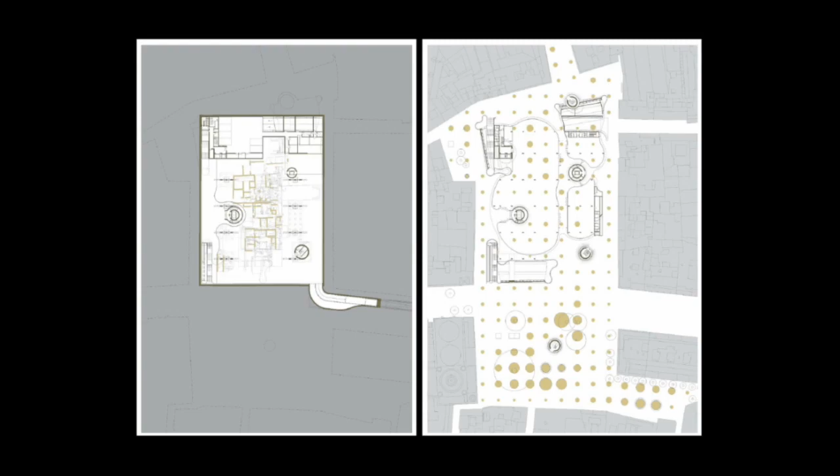The building actually came with hopes on 3 scales. On a very local level, to bridge the development of the southern part of the downtown into the northern part, which was at that point not dangerous, but a little shady. Then, of course, on a national level to compete with other cities who went through an innovation moment, and also showed they're part of the 21st century, like Bilbao, Barcelona, Tenerife or Valencia. And then on an international level to, of course, attract more tourism, but also to attract a certain kind of industry and innovation economy.

The structure is about 150 meters long, 26 meters high, like 6 stories high. And what you see here in the section, what's dark is concrete or steel. What's light beige is a timber construction with a polyurethane coating. And this is when our prototype with the dining hall came back. We had to compare the structure, since we didn't really think of a material when we designed it, how to build it.

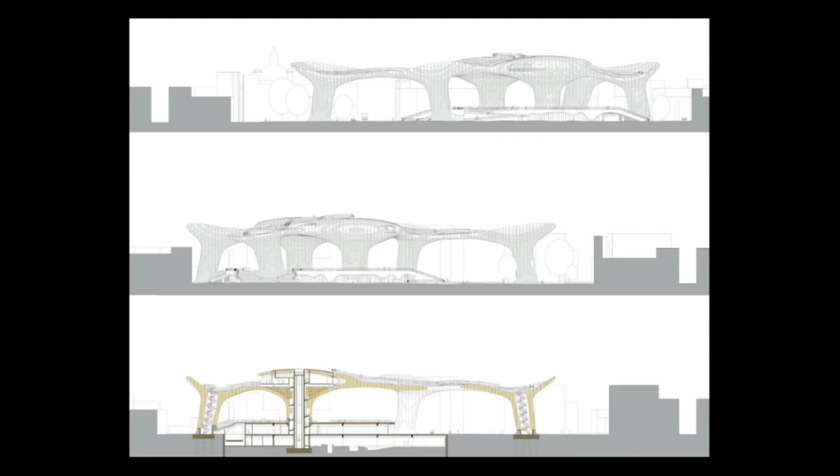And we compared steel, again, with glass fiber reinforced concrete, with wooden timber layer with protection, with polyurethane coating, or without. And in like 3 processes, with the city, with the contractor, and also with the construction company, always the timber construction with the polyurethane coating came back as the solution when you compare cost development, prefabrication quality, speed of construction, noise control, wind noise behavior, earthquake behavior, expansion contraction when you have hot days, cool nights, and so forth.

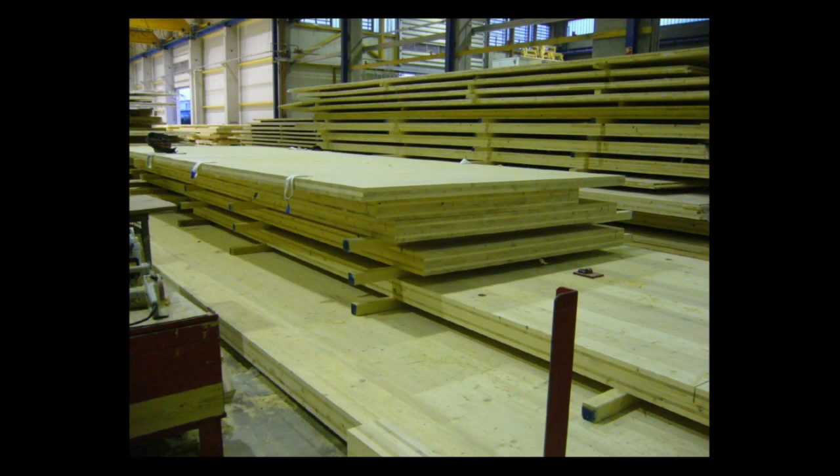So it's a process that's actually not guided by any, say, taste or favored issue, but actually a very clear kind of catalog of categories that you have to consider. And then step by step, we also used the same company from Munich, Finforest Merk, to develop this project further and build it.

And here you see some of the wood process panels, construction pictures. The building maybe is the largest timber construction in the world, and I think it is, that's what we were told. The real innovation at this point actually happened in the joints. It kind of doesn't look like it, but it actually is now, again, we were told, the largest building that is glued together. It's bonding technology that actually saved us and provided us a possibility to build this thing.

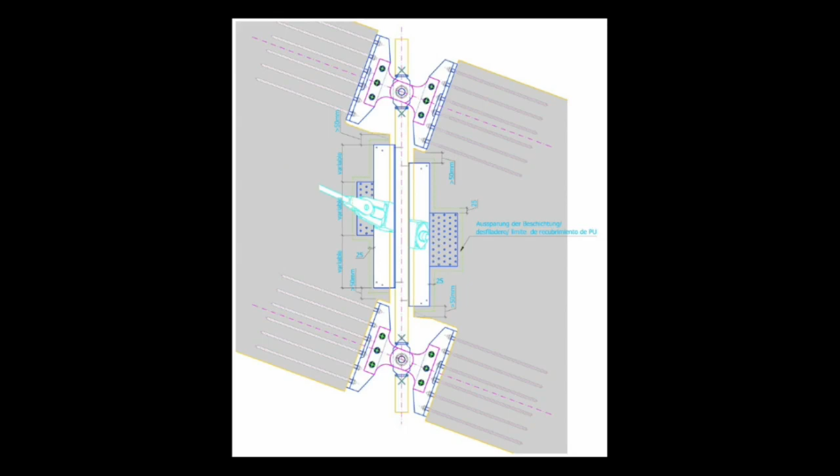The forces from one piece to the other were so strong that the wood would actually melt away if you would bring the loads only in a very small surface into the wood. So we had to bring the loads very deep into the timber to distribute it more equally. But the forces are not brought in by screwing the metal rods into the wood, but actually by gluing them in. And this is a glue that was developed by the Fraunhofer Institute in the last couple of years, on the market now maybe for 4 years.

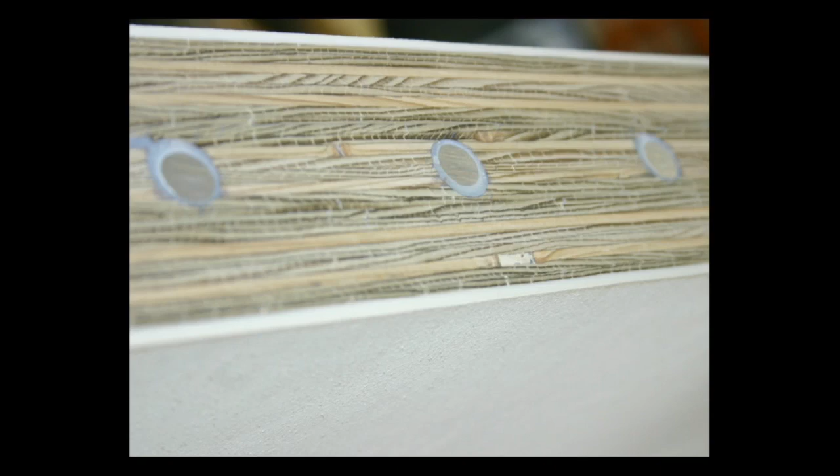And here you see how it's actually made. This is the steel rod that takes the load into the wood. This is the glue, and then you have the layers of the timber with the polyurethane coating. And this was the only way actually we could do it.

There was one challenge because we didn't know if the glue actually also survives when it gets really hot. But we had to do some tests, and it showed that only the first 4 centimeters were critical with the heat development from the metal detail into the wood. The rest was tempered enough with the wooden material around it. But there was kind of a safety issue, so we tempered the whole structural pieces.

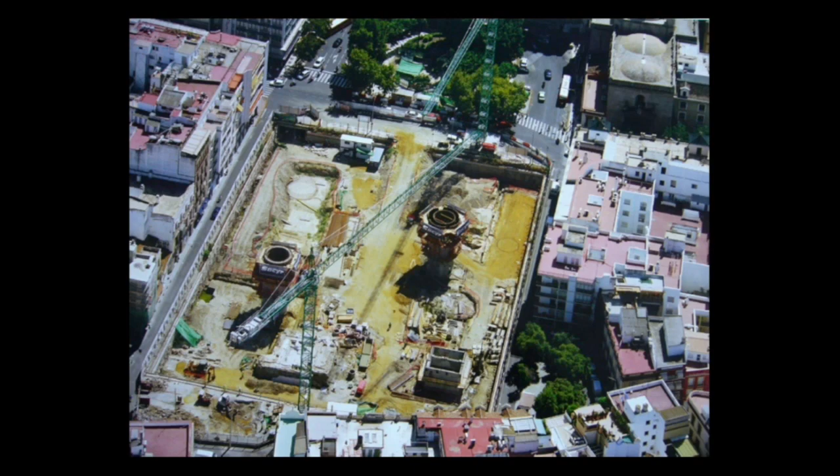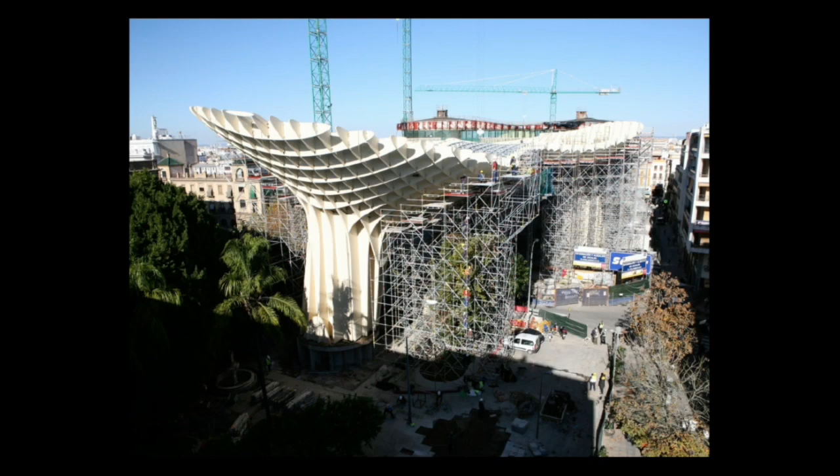So some images from the construction site. You see the 2 concrete cores for the elevators that had to happen in concrete because of earthquake. You see the substructure, the scaffolding to hold up the pieces. So even that is somehow like a very old-fashioned way to build it. And I think the quality of the project in the end comes from the dialogue between the Metropol Parasol and the old architecture of Seville. I think in that combination, it really becomes kind of a seductive proposal for the city.

There was a lot of criticism, of course, from a more middle-aged generation, who couldn't really see it. The older people were very supportive because they were happy to see something happening. The younger people felt something happens, there's a future that comes up, because the city really wasn't going anywhere in the last 10 years before they started with this competition.

And in the realization process, the voices who were fighting against it became less and less dominant. And it's quite interesting to see how the everyday use even convinced very harsh critics to a moment where they seem to appropriate it even for their uses, and I'll show you an image in a second.

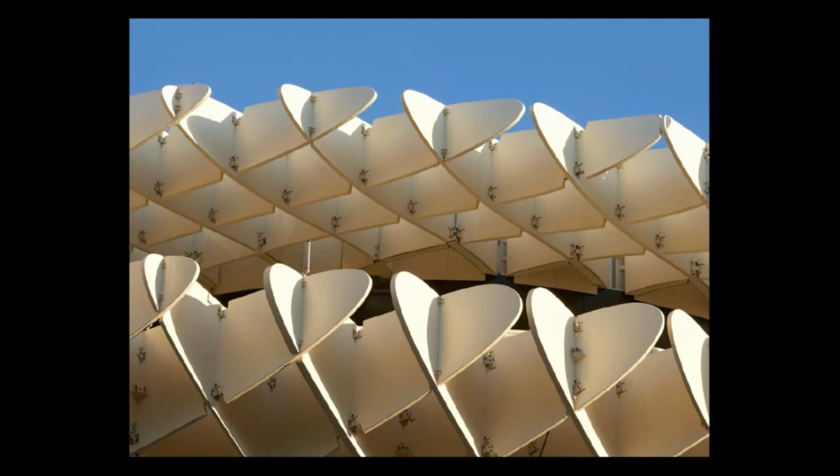But this is now some impressions. When you're up there, you overlook the city. It's the other moment where you have a chance to actually look at the roofscape of this kind of secret hidden city of Seville. You overlook, and you always have the contrast between the contemporaneity of the building and the old city.

This appropriation that I showed you, and of course the Catholic processions that happen every year the week before Easter, were one of the most critical moments to convince the critics from those kind of activist groups. But it happened that this year they even put it on the cover of the leaflet of the Semana Santa program. So it couldn't be so bad anymore, I think.

Also, when you have these processions, they're very silent somehow—you only hear the music, this old traditional music, people breathing as they carry these really heavy loads, and then all the citizens and tourists visiting and watching. You have moments where it actually needs to be managed and programmed, and there's stuff going on that also changes over the year.

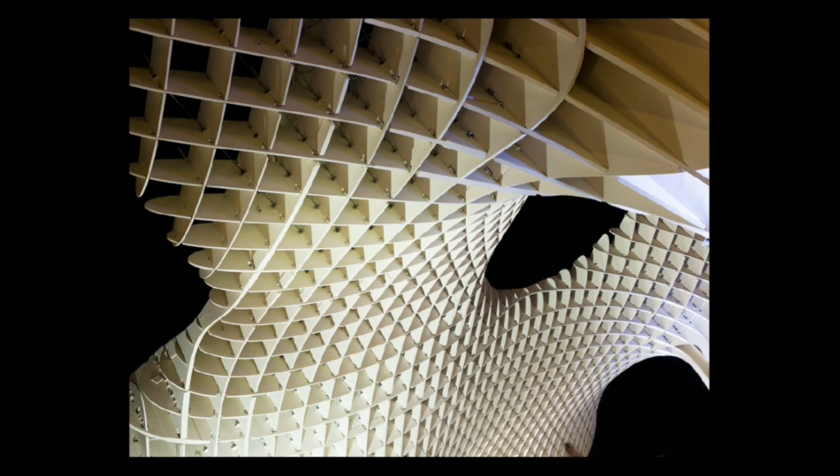And people also slept there, so in a way it became a new living room for the city, a new gathering place. And I think there's no better gift that a city can give to its citizens than to really welcome them and envelope them where they can meet and celebrate community in all different kinds of forms of communal experiences.

And this is also how I would like to end the lecture. It kind of wraps the lecture by showing you some of the patterns again, and you see it all might come back, or not, to an original idea. Thank you very much.

I think I can avoid it, right? My voice is disappearing slowly, but maybe it's fine. Yep, I hear you.

Can you talk a little bit more about the translation of the detailing in the last project, the Parasol project, between the mock-ups—like the chipboard models or the little wood models—and the transformation of that detail into the actual detailing of the full-size piece? What prompted the decisions, and at what point did you have to decide that the detailing had to be significantly changed or investigated?